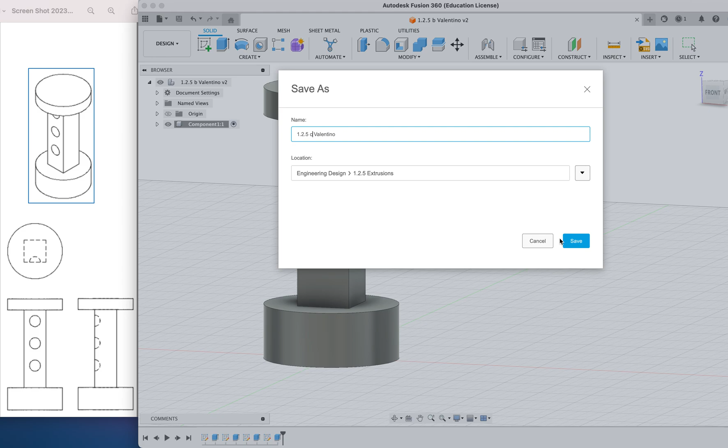The key to this is I want to use this figure as a base because we already did all this work to make it, so why remake it? An easy thing to do is just save. Make sure you're saved as your original figure, 1.2.5b. Now go up to File and hit Save As, and change that B to a C, so now it's 1.2.5C and your last name. Now we can do whatever we want to this, and we still have our other file.

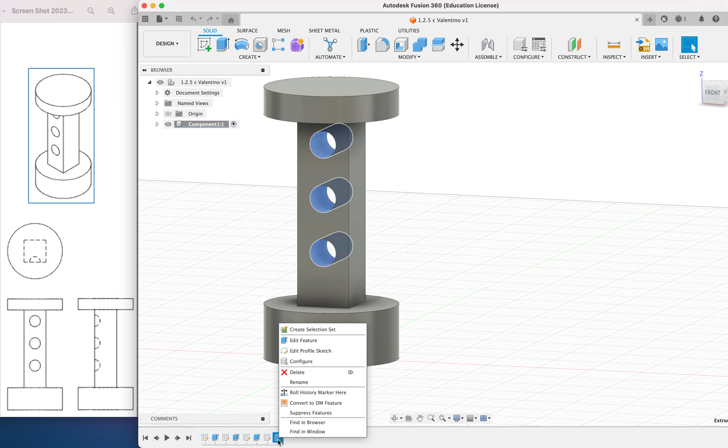The first thing I want to do is take out these cylinders. The way to take out these cylinders is go down to the timeline, this is the extrude button. If I click on the extrude button and hit delete, they're gone. Now I have these sketches here, but I don't want to deal with these sketches either. I'm going to delete them because I want to make a new sketch.

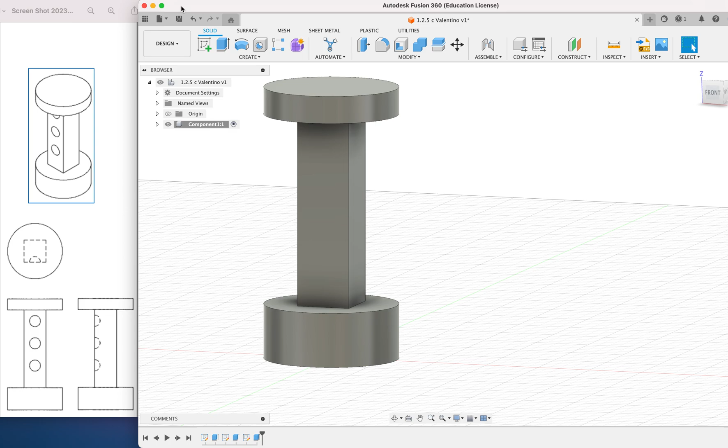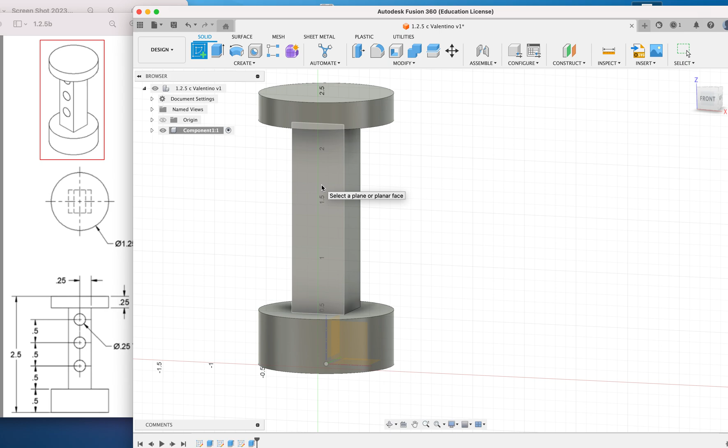So now we're just using our base piece right here, and we're going to put in the new circles, and then scoops instead of a through type. The circles are the same right here, same way we did before, I just wanted to do them fresh. What you have here is 0.5, 0.5, 0.5. I'm going to sketch right on this front view, just as we did before.

I'm going to create my circles on this green line, and each circle has a 1/4 inch diameter, so 0.25. Create another circle, you can also do a copy button but this is just as easy, 0.25. And then I'm going to create one more, 0.25. So I got my circles again.

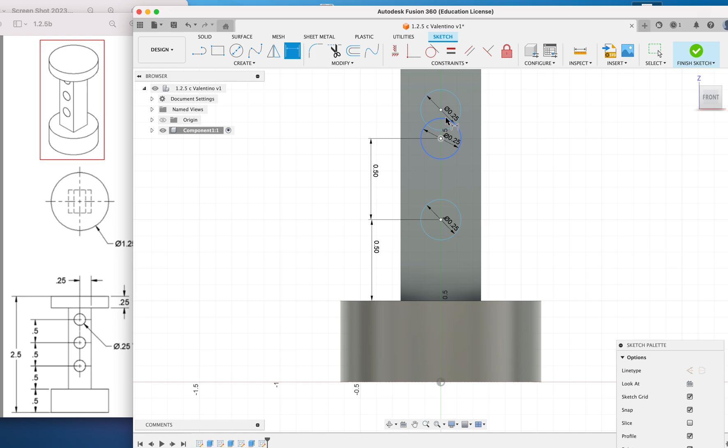I go back to my dimensions again. Practice makes perfect. 0.5 from the bottom, then 2 more 0.5s. And then you may go like, oh no, they're overlapping. Well guess what happens? When I do my dimension and constrain it, it's going to go from overlapping to being perfect again.

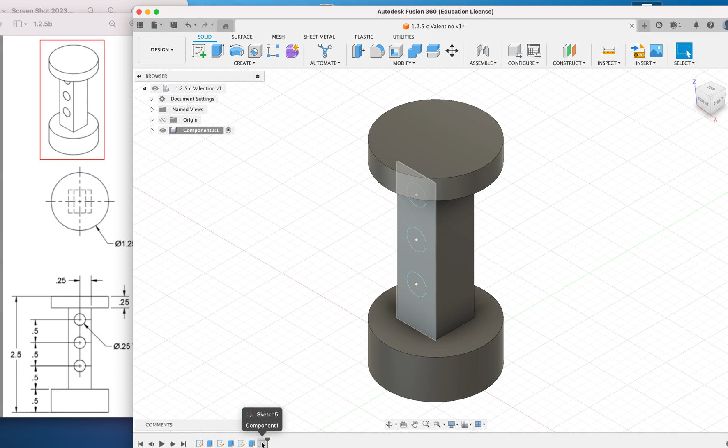So I finish my sketch, hit my home button, and I have my circles back. Now I don't want these as circles though, I want these as semicircles. So what I'm going to do is double click back on my sketch to get back into it. The way to make this work is make them a half circle and then scoop them out. The best way to do that is go to the word that says line, and where that green line is, draw a line right down the middle of all those circles.

This is the easiest way to do it. Obviously you can do it for each one, but I like to do it in one shot. Now to make each one of these, I just want half of each circle. It doesn't matter what half, but in order to get half of each circle, I have to get rid of this other stuff.

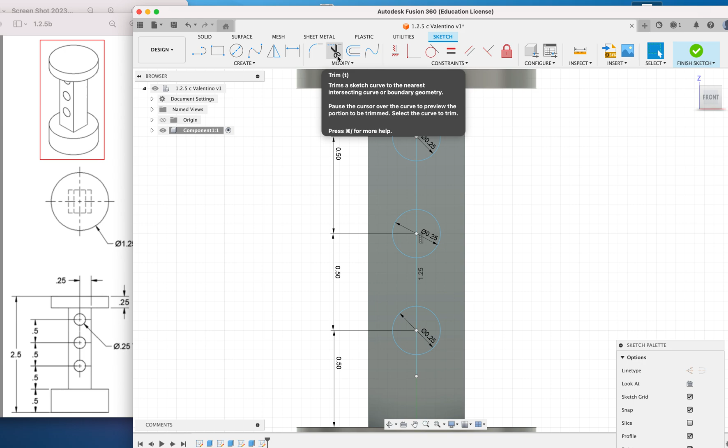That's when I use this button, this is called the trim button. The trim button is like scissors, it cuts out the piece that you don't want. If I press this, that's the piece it cuts out. Now I want to cut out this circle right here, so I press that. I want to cut out between the two.

Now notice I'm left with this. If I accidentally hit something on here, I just press Control Z, that's the undo button, and it comes back. Or Command Z. And then I go back to my trim.

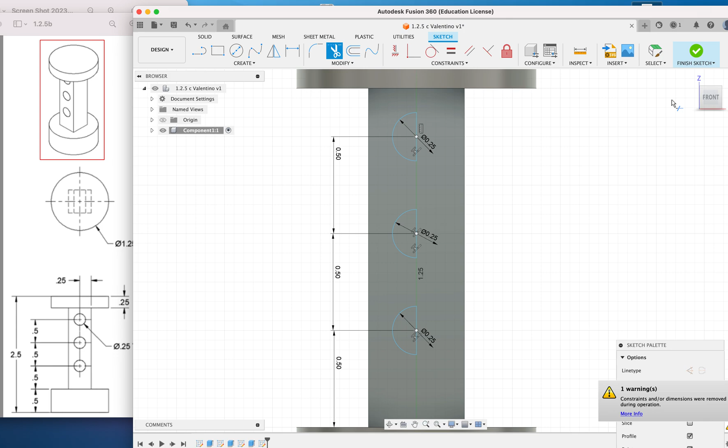So what am I trimming? I'm just trimming the sides, anything that I don't want to keep. So now I trimmed all that stuff. I hit Finish Sketch, don't worry about the constraint warning down here. And then I press Home, and now I got my pieces.

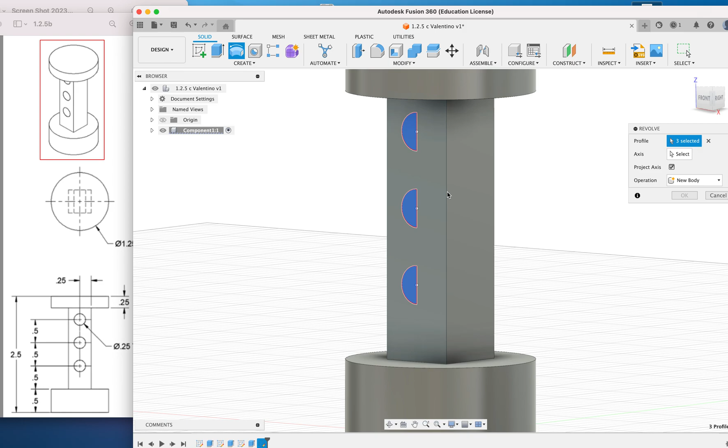Pretty simple. And the last thing you're going to do is go to Revolve. I'm going to click Revolve and hold Command on each one of these. And when I revolve them, I have to pick an axis. Where am I revolving it around? Well, obviously I don't want to revolve it around something that's not connected to. I want to revolve it around the center axis, or the green line, so I can just pick this axis.

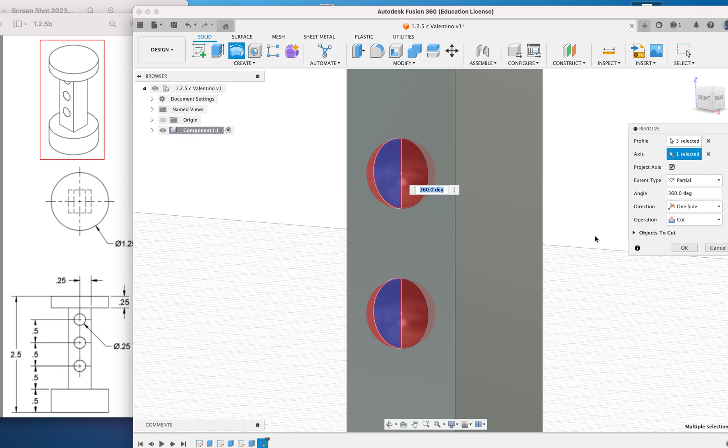Pick one of these axes, I'm going to pick this line right here. And what happens is you can see it's at 360. You don't even need 360, you can pretty much do 180. But what happens is if I try to revolve at 180, it pops out like that, and it just adds little balls to it.

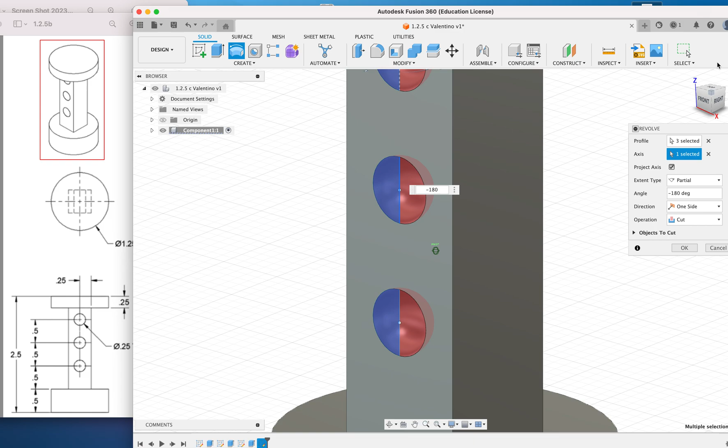We want cutouts, so if I go negative 180, it actually cuts in. How do you tell it's cut? Remember, the red means cut. You can check down here to see the word cut. That looks good. I hit OK, and now if I look in here, I can see these smooth little ridges that are taken out. And that's the cut button.

I'm going to zoom out, make sure you can see my cuts. Perfect, zoom out a little bit more. Drag this guy over towards my name, I don't need that open. Command Shift 4, take a picture, and I'm done.